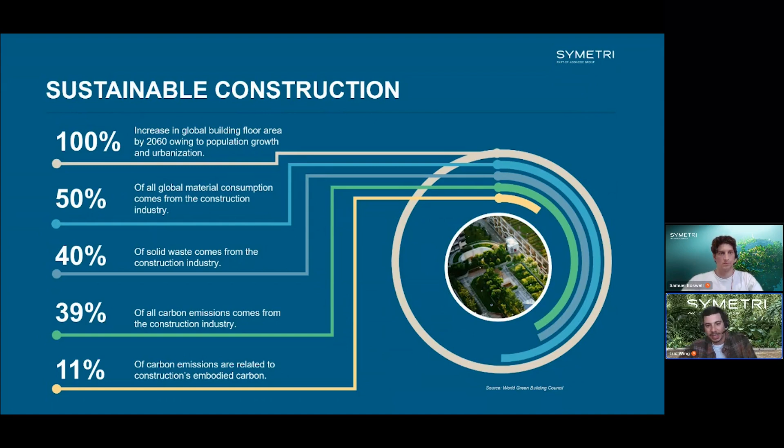So as designers and in the construction industry, we play a huge role in our carbon emissions and resources and consumptions. So sustainable construction is about minimizing this environmental impact that we have. So by using recycled materials, energy efficient materials, and reducing our waste of these materials, we can really just build smarter, right? And lower our emissions, create even better outcomes for our projects and the communities that they're built in. So it's really important to address this because right now, embodied carbon, at 11% of global emissions, is tied to the building process. And that's not even accounting our operational energy at the moment. So we have some work to do.

But our commitment through sustainability is really reflected through actions. We're not just talking the talk, we like to walk the walk. And so through collaboration with our partners like One Click LCA, because we see this as important and meaningful to drive the industry for change, one of our key initiatives was developing Naviate Zero, which is powered by One Click LCA, which is hopefully going to enable you guys, the users, to assess carbon impact earlier in the design process and take this proactive approach to data-driven design, and really help you guys understand your materiality and the impacts of those through the design process. So our co-innovation lab is really the driving force behind this. It's really focused on transparency. We're focused on collaboration and innovation with values that are really effective to decarbonization. So our goal is to provide sustainable solutions that make a difference in the built environment. And I think that's why you guys are all here too, because that's what you guys want to learn how to do.

So real quick, we'll just get the LCA portion out of the way and get the overview of what LCA is. If you were here for the last 2 series, you may have a good understanding, but for some of you freshies or newbies in there, let's go ahead and cover it real quick.

So what is LCA, or life cycle analysis? You hear this term all the time, it's the alphabet soup, everyone loves acronyms, they throw it out there. But really, it is a systematic methodology that we use to evaluate our impact of a product, service, or process over its entire life cycle.

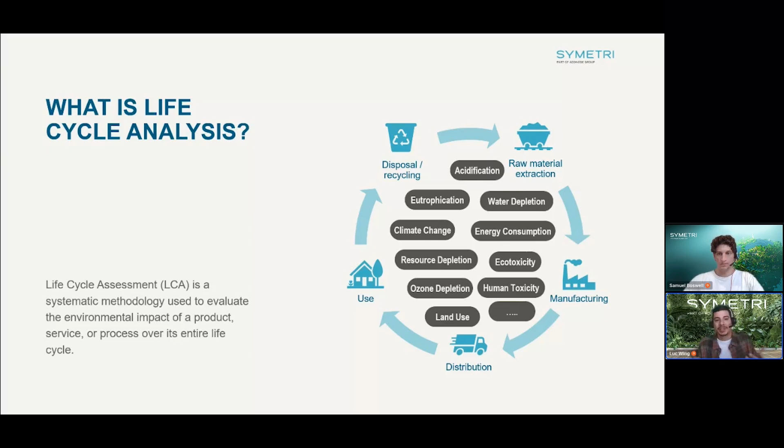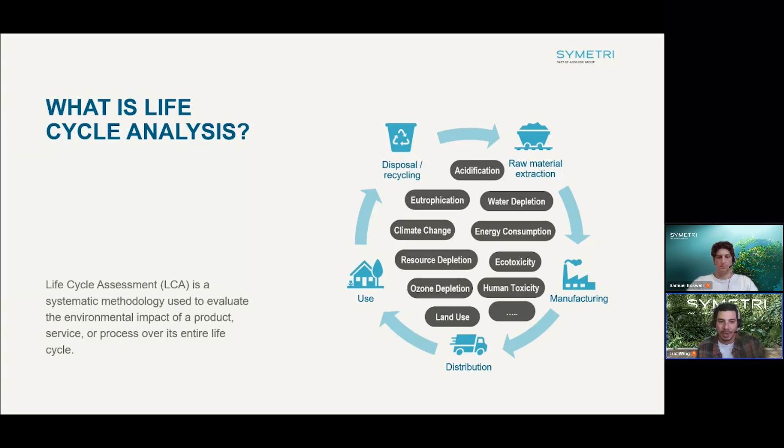So LCA really considers various environmental indicators through that entire process. What we're looking at is greenhouse gas emissions as one of the main drivers, energy consumption, how much water usage there was, and waste generation. So all of this is used to assess the product and the overall product sustainability performance, falling across this whole life cycle.

And the life cycle assessment follows international standards, the ISO 14000 series, and then we have ISO 21930. These rules are really for environmental product declarations, EPDs—that's the driver behind all this.

So in construction, EPDs help support the full life cycle shown on this slide. Those EPDs report on the product kind of like a nutrition label—you go to the store, look at your cereal, see what ingredients are in there. That's what the EPD is doing for you guys.

So for our Naviate Zero, we're really designing it for you guys as designers, and it's powered by One Click. We're getting all that wonderful, rich data that they've graciously gathered and sorted out for us, and we focus really on the essential A1 through A3 modules, which is in the early stages—those are mandatory for products at this level of assessment.

We're looking at the extraction, the transport, and the manufacturing of that product, because as designers that's really what we have control over—the specification. Whoever's procuring the elements, depending on the contracts, they're the ones responsible for purchasing those elements within that spec. So our LCA is only as tight as our spec.

So our goal is really to make it easier for designers to meet these standards, understand their specifications with Naviate Zero, so they can deliver better products and start specifying those into their projects.

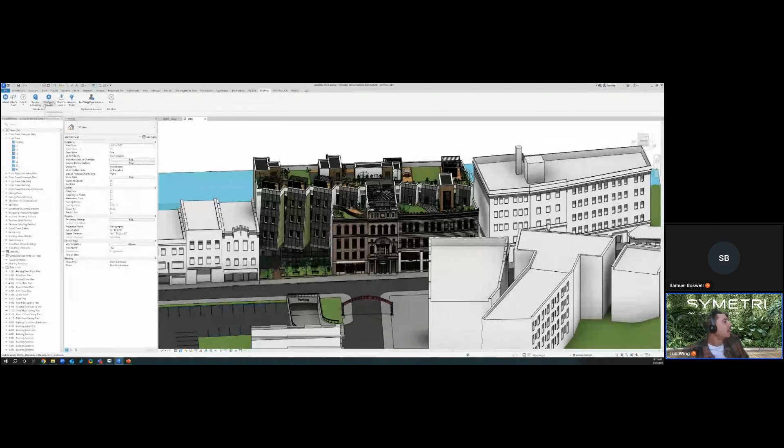We have a help bar on the right-hand side. When you click on this, it automatically takes you to our Naviate help panel, where you can see what's new, learn about help, and access Symetri learning tools and modules—fantastic if you want to see best practices or workflows. You can also configure Naviate here and check for new updates. You can even submit ideas—if you have an idea how our tool can be better, go to the ideation portal and tell us what you need. That's the best way to get our tool featured and focused around you, our clients, because that's what we want—for it to be tailored for you. Also, when you get out, you can click exit and it'll take you right back to the Naviate Zero screen.

The first thing you want to do, because you can't do anything else with Naviate Zero until you click the settings button. When you click the settings button, it's going to open up a really simple user interface for settings.

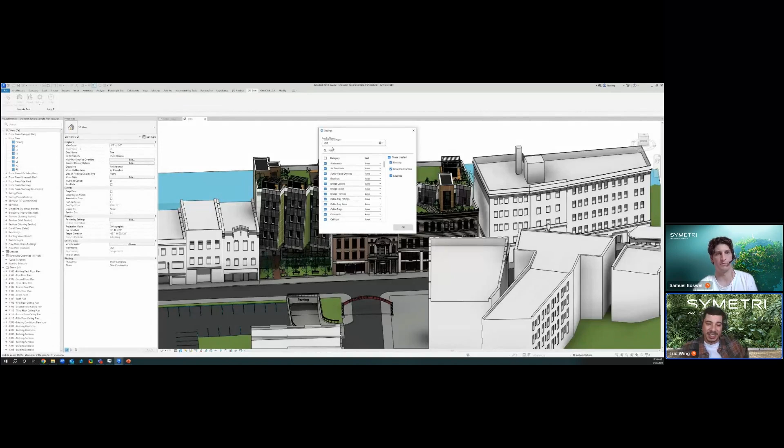Right now, it automatically wants to limit me to the United States of America, which is fine if I'm in the US. But say I'm in Europe, I can go ahead and take that filter out, and it'll go ahead and open up the databases for me.

Early on, we may not be as concerned whether it's TRACI or CML because the calculations are exactly the same, they're just reported differently across the pond. So we start off with a wider range because we may be procuring materials from across the pond, or from the US. We don't know yet, it's still very early on.

As we refine our model, we whittle down our information and make sure that all of our data is within that proper database if we are reporting to something like BREEAM or LEED. If not, you're doing this for your own personal exercise, just for learning.

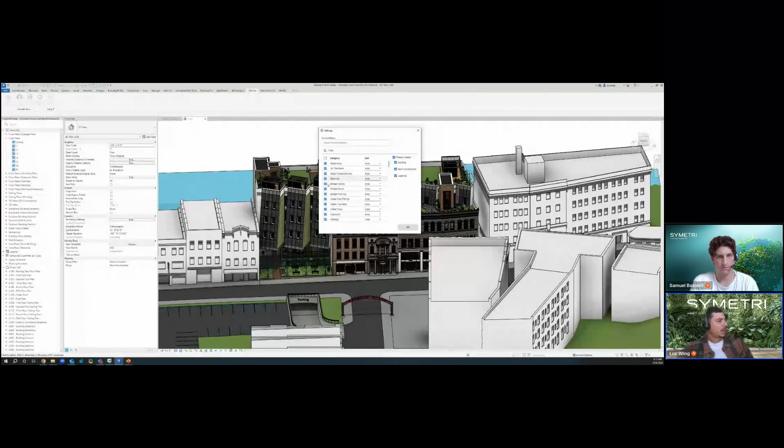With this, say I don't want to go through all the categories, I can uncheck all the categories that I don't want. Let's just do an architectural run real quick. I'm just going to turn on my walls for simplicity, so we don't have 9 million categories pop up with all the complexities.

And I'm just going to keep my walls in the new construction. I'm not going to worry about everything in the existing at the moment, because I would want to run those separately, to understand existing versus new and where that line is drawn. So I'm going to just do walls in new construction for now, to try to simplify it.

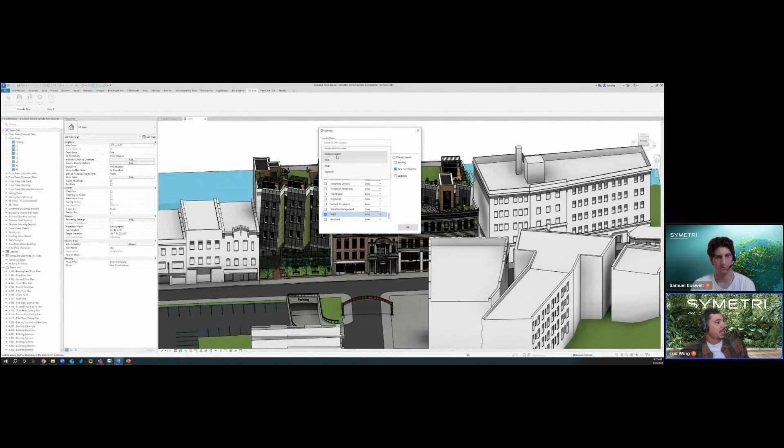And it says, please select an area where the building is going to be situated, so it wants me to put it within a region. You can see it gives you every state in the United States, and it also gives you countries down at the bottom, so you can pick the United Kingdom or USA. I'm going to assume most of you guys are probably across the pond, not in the United States, so I'll go United Kingdom for the example today.

I'll warn you guys, I am not as savvy with the metric system as I should be. So nothing happened, but it looks like everything is good because my settings are set. I didn't get any warnings, we are good to go.

Next thing I want to do is go to apply resources. This is where the magic happens, this is really the meat of the tool. This is where you're going to be doing your mapping, and it often takes the most amount of time.

People are too concerned here about being 100% accurate and right, and that is not always the case. We're trying to get a general understanding early on, so you want to find something that aligns with your spec, but you don't have to go through it at that level of detail. We provide all that information in here for you.

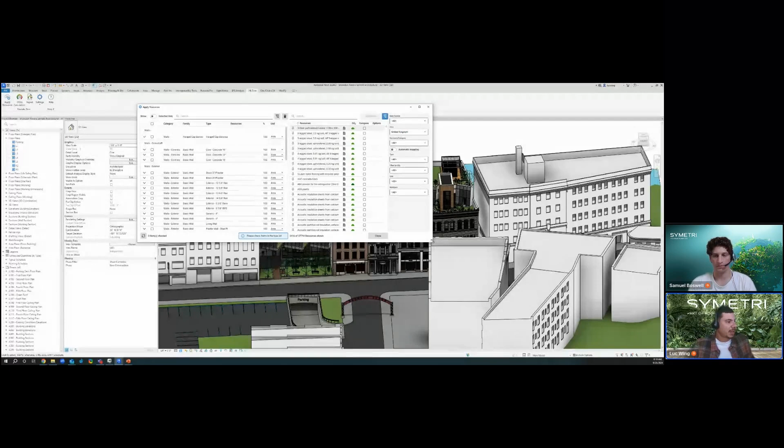This interface is probably very similar to what you're used to for any LCA process. You see your wall category here, and you have a category tag confirming you're in the walls. Then you have a family, it tells you the parapet, caps, and bands, and then the type. And then it tells you 100% of that area, so you've got all those walls.

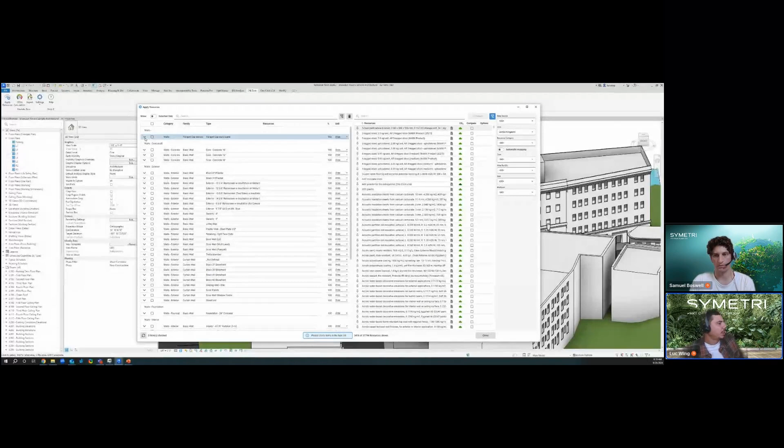So what we'll do is expand on these walls and you can see the makeup of those walls. Within this assembly, these are the different layers in that type. Does that make sense? It's going to break it up and group it in that manner. So these are just basic concrete walls, and look, there's only one layer of basic concrete.

Let's just go ahead and knock this out real quick. What I would do is go ahead and look up my spec. Let's see what kind of concrete you're using, what's your density, when's the cure time, is there any kind of additive materials in there? Fly ash? Is there replacement concrete, recycled aggregate? These are things you kind of need to understand from your spec before you start picking this.

Now, you're going to see that we probably have 100,000 concrete EPDs to choose from. Let's just look.

There's a whole bunch of concrete to go through, so that doesn't really help us. The next thing we need to do is understand the type of concrete. This is a wall core, looks like a shaft wall, so it can't be lightweight concrete, and it's not going to be a block. We have to understand exactly what we're looking for.

So you'd go through and find your concrete type, and all you have to do is click and map, right? Let's make sure we find the right one - concrete walling unit from Semi-Dry Mix. All right, we'll say this is it. All you have to do is click your resource here and then double click apply.

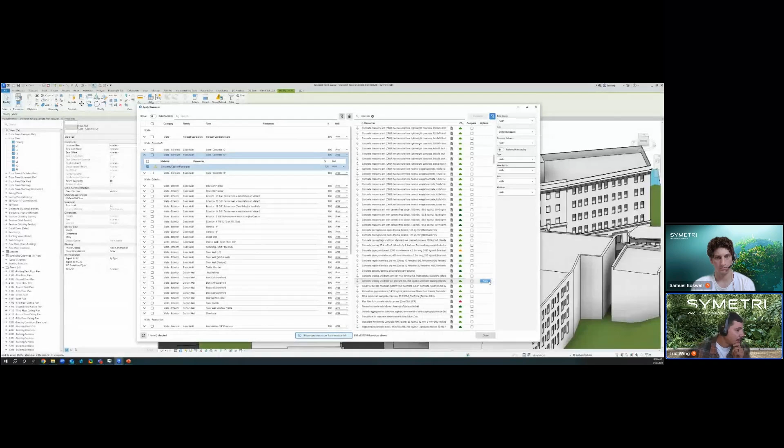And it says wrong resource. Why is that? I'm not sure why it's failing there, but okay.

Let's see if we can find a different concrete that matches that - some high density concrete blocks, baseline concrete. Let's just try generic concrete. This should work, right? No, all right.

What's the warning we're getting here? Why can't we apply this? Failed, wrong unit. So this concrete is probably going to be in cubic yards or cubic feet, I'm assuming, and this is asking for an area. So you'll need to go ahead and update that.

Let's check a look here - doesn't give any information. Oh, meters cubed. All right, so let's go ahead and change this unit to volume. Concrete is typically done in volume, and I bet you it applies now.

And voila. So say we were wanting to compare these two different kinds of concretes - maybe these two C40s. They're 50, 50, and then you have 38 GGBS and 0 GGBS. So what's the difference between those?

Well, within Naviate Zero, you can go ahead and click and compare these. And you get the compare resources tab where it puts them side by side, and you can start seeing the CO2 impact, the resource name, also get the categories and check out all the information and data that's provided.

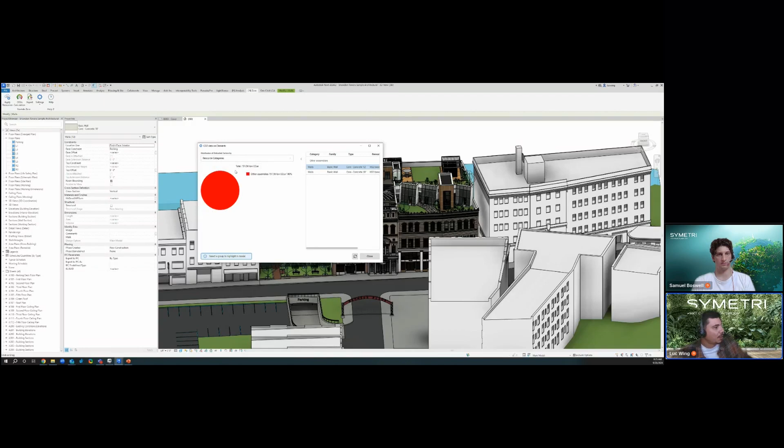There we go. And so obviously with one type of material in here, our impact is all going to be concrete. So if we did some other categories, we can add different categories in there and show what's the impact of all those. So if I went and added some steel, you would see some steel and it would show you the impact between those. In fact, we can go ahead and do that real quick just to show you.

All right, so we're going to turn off that selected only. And let's go to, let's do this parapet cap. Let's just say this is aluminum.

Check there and click apply. It's not going to go by area, it's probably going to go by length. So sometimes you've got to just take a guessing game with what type of unit it is and how much you got.

Well, apparently I can't use that one at all, so let's look for a different one. There we go. All right, so one item applied, it tells you there. I can go ahead and close.

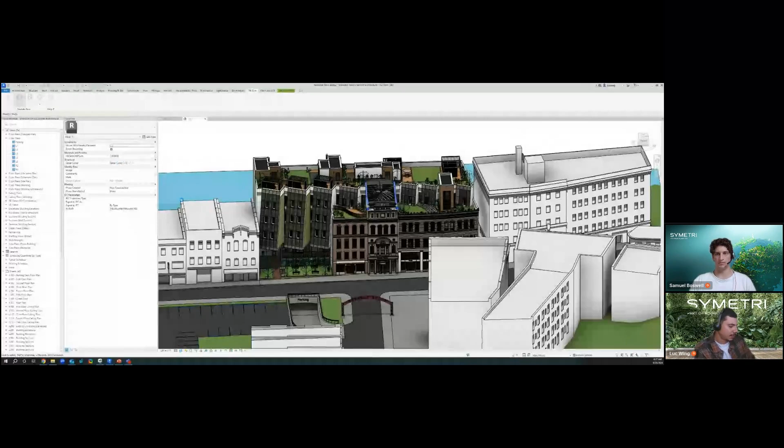And then let's go back to our chart, as soon as it opens. All right, and it should be updating with the different categories. There we go. And now you can see it'll break you down with the two different types of materials we have and the percentage of their impact.

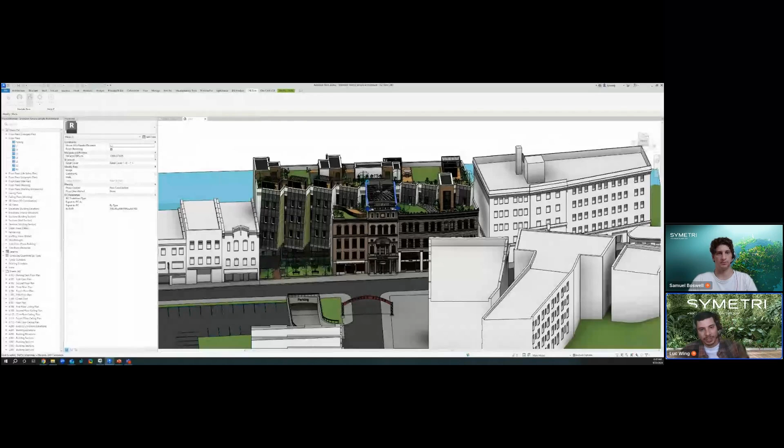So we can start deciding maybe on a general level which direction we want to go. You can also export those and that will come out into a nice packaged report as well. And then we can also use this material information within the One Click environment as well when this is done. Apologies for all the waiting.

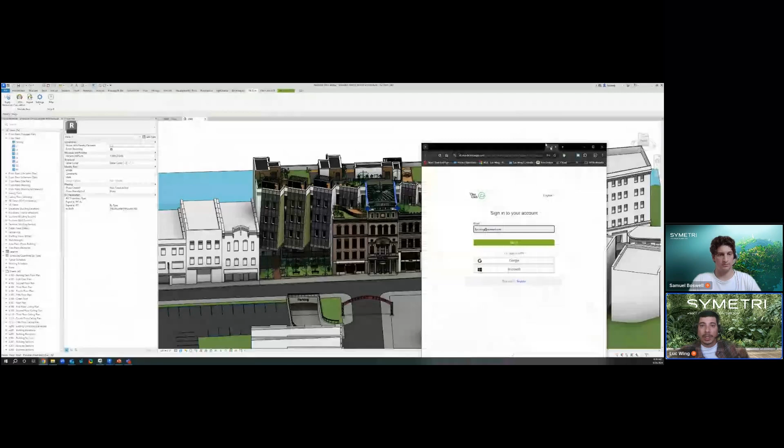Let that crank out. There we go, and it'll create you a nice export that wants to take you right into One Click LCA. So with that, I think this is a good time to segue over for Samuel, and I'm going to go ahead and pass the mic over.

Hi everyone, Samuel here. I will now be running through One Click LCA, so how that really works well with Naviate Zero, but also delving into a bit more specifically how One Click LCA itself works. Right, so to start off with, the key roles that the One Click LCA software supports, or life cycle assessment as a whole, is you have architects, engineers, builders, manufacturers, investors, and institutes. So it really does apply across the board for the construction industry, anywhere in the world, really.

So for architects, they design for net zero carbon strategies for the developers. They can compare the different material options, determine what the best routes for the different design options can be. I'd like to emphasize the importance of doing this earlier on. This is really where a lot of these kinds of life cycle assessment or embodied carbon calculation tools have the greatest effect, at the earlier stages, because this is really where you have the greatest ability to reduce the impact of a building. If you know exactly where the impacts are potentially going to come from, you can address them without going further down the design process and then struggling to implement those changes later on.

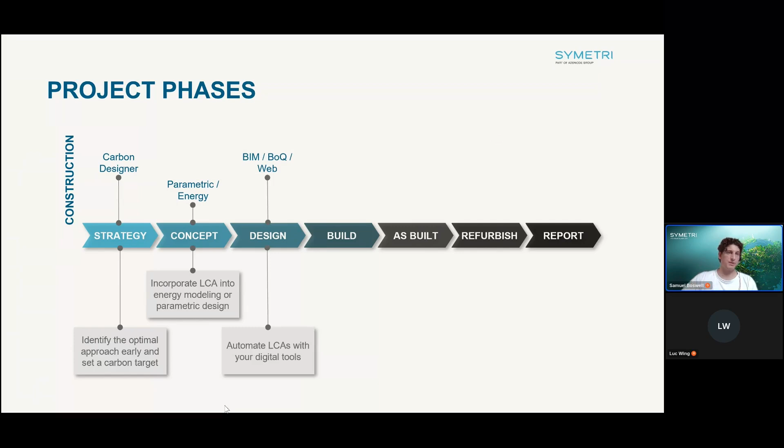At the concept stage, you can import information from parametric modeling, but also energy models like IES, Design Builder, and so on, and of course BIM integrations with Revit, so you can export all the data coming from there. This makes life a lot easier when you're trying to combine the data into your LCAs.

You can specify and compare at the build section. So if you're looking for different materials that would be a very sustainable choice, it's very easy to look through the database and see what options there are out there.

Then as-built - this is kind of the most ideal time to do an LCA because you have all the information possible, so that's going to be very simple then.

Refurbishment involves building circularity as well, because this really goes hand in hand with LCA - essentially how recyclable or how recycled and reused the materials in your project are, but also what happens with them at their end of life phases. So it works perfectly with LCA, and you can actually do these two forms of analysis concurrently without having to do very much extra work to generate results for them.

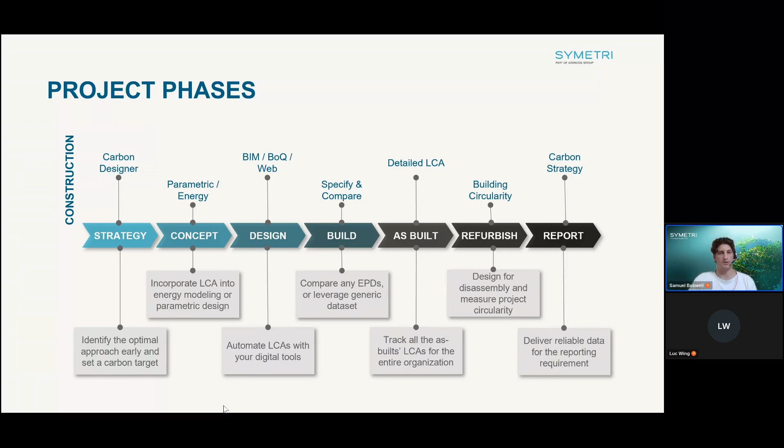And then lastly, we've got the reporting. So all the ways that you might need to report the information about your LCAs, the software is going to be able to do that for you.

At this point, I will now go into the software and show you what I mean by some of the slides that I've spoken about. I'll stop sharing this screen and come onto my webpage.

Okay. Let's just check that's sharing.

Perfect. Okay, so to start off with, I'm very quickly going to flash this page up. I'm not going to go through it now, but this is when you hit the import from Naviate Zero tool, it's actually going to bring you to this page here.

This is the typical import process if you're using any form of integration, whether it's coming directly from Revit, from Naviate Zero, or even if you're importing an Excel spreadsheet like a bill of quantities or a cost plan. This is the process you go through to essentially map the data from the One Click database to the data you're importing. We do have a webinar that Nicole will share a link to where we go through this process in more depth.

One of the key strengths between Naviate Zero and One Click LCA is that Naviate Zero uses all of the data within the One Click LCA database, so it's unique in that sense. It means that anything you map within your Revit model using Naviate Zero is going to identically map data in the One Click software. So the import process is completely seamless - you go through these stages, add it to your project, and you'll have all the results come up within One Click, where you can go into more depth with analysis.

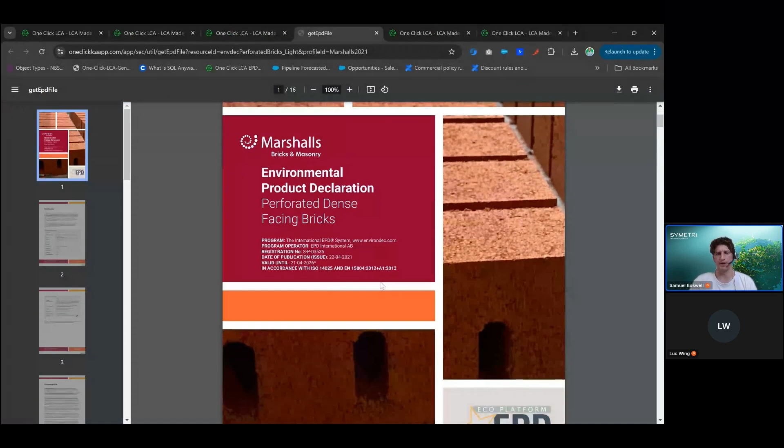You can also download the EPDs directly. So if you want to gather these up for any specification needs, you have all the information very easily accessible. And that's pretty much it.

Just a quick thing to go through: of course you can input individual materials, but you don't necessarily want to do that at the start. So we also have thousands of constructions made up of multiple materials, which saves you a lot of time.

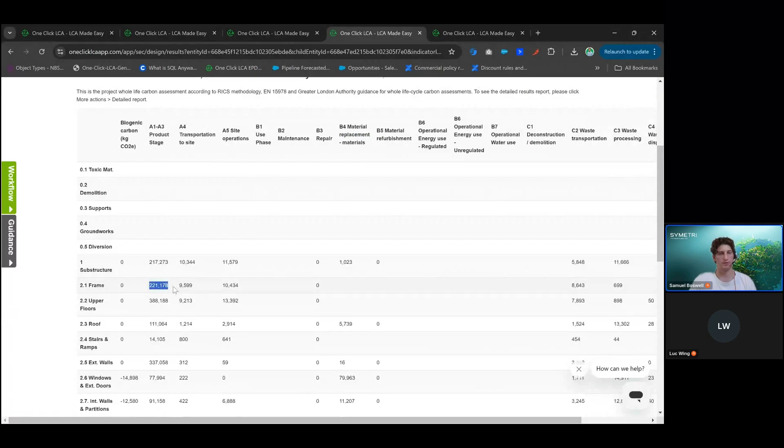At this point we're coming close to the end, so I'm going to go into the results section now. This is the results for my Option 1 baseline, looking at the RICS version 1 tool. This is what the interface looks like - you've got a table with the overview of results here, with life cycle stages across the top and building elements according to their RICS classification. The number is the corresponding kilograms of embodied carbon.

If I scroll a bit further down, there's a completeness checker that's just double checking you haven't input an extra zero or you're not missing anything, so you can validate these things and the software knows it's all correct.

This one's very useful - the most contributing materials - you can see what the most contributing materials are. For example, this reinforced steel is producing 136 tons of embodied carbon, that's 6.4% of the project. So we can show sustainable alternatives - a list of materials that are either the same or similar properties that would be a more sustainable choice to go with. It's very easy to optimize the sustainability of your design.

The section below that is then the graphs, so you can really drill down into the results and where the main impact areas are coming from. This one's showing embodied carbon by life cycle stage, and you've got it by classification. For example, internal finishes are very high in this design, so maybe you want to duplicate this design and play around with the internal finishes, try out different materials, and then you'll have a comparison of what those impacts might be.

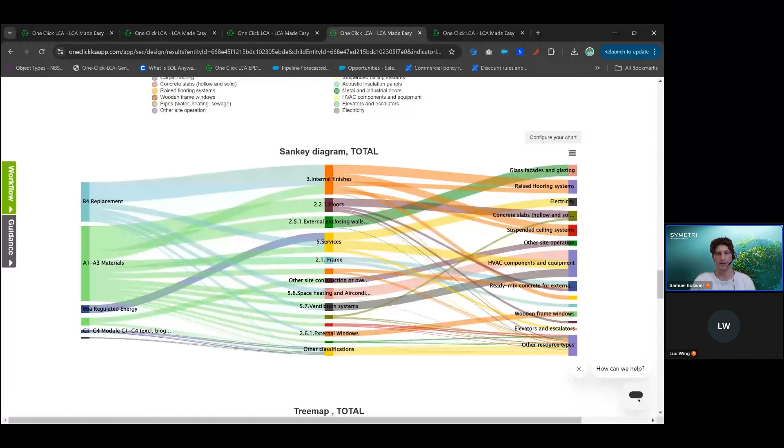So lots of different ways to see the data - you've got bubble chart, Sankey diagram, and so on. That's pretty much it for that.

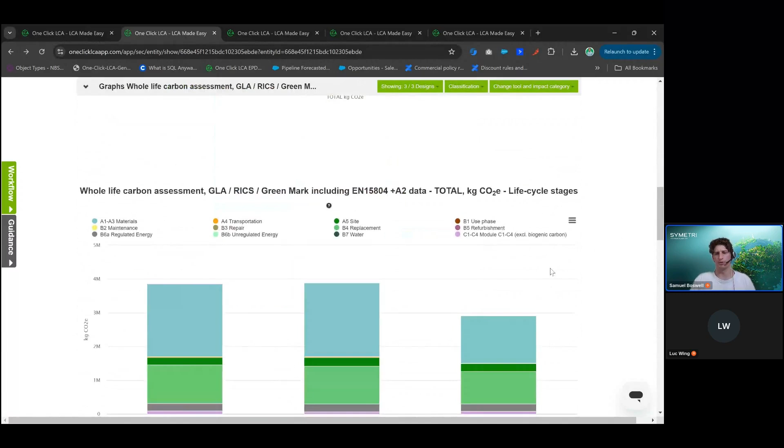I think just quickly I'll show you there's actually one also very useful set of results, which is on the project homepage here. We've got a set of graphs essentially comparing my 3 designs to each other. This one's showing the total embodied carbon comparison, but also things like embodied carbon by building element, so you can again see where the main impact's coming from. Everything can always be downloaded as various different image files or Excel - the raw Excel data can also be downloaded.

To round off, Naviate Zero empowers everyday designers with tools for informed decision-making and efficient lifecycle analysis, while One Click LCA supports the in-depth lifecycle assessment process and robust reporting, providing specialized solutions for core users.